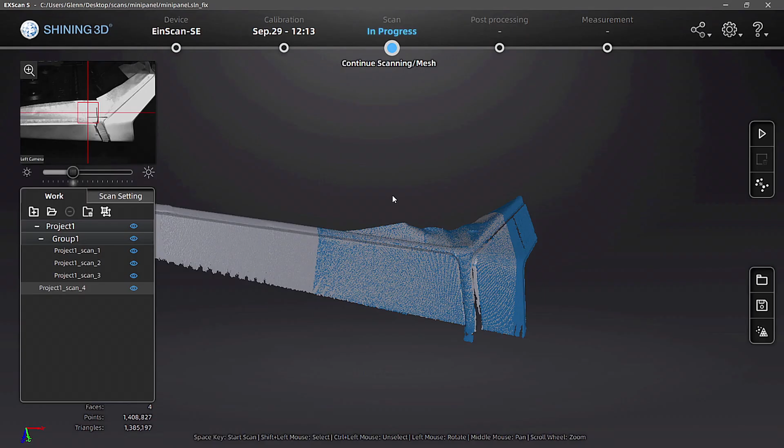Welcome to video number 2 on building our Streamdeck trackball controller holder. You remember in video 1, we scanned our Resolve mini panel. We took that scan into Fusion 360 and we built a mock Resolve mini panel inside Fusion 360 using the dimensions from the scan. We then brought in a mock of the Streamdeck, positioned that in an orientation where we could try to have 2 Streamdecks next to the panel.

That's what we want to build a box around today. We want to build a box that can hold the Streamdecks and eventually hold our trackball as well. We want it to all incorporate as nicely as possible into the side of the DaVinci Resolve mini panel. So let's go into Fusion 360 and see what the next step is going to be.

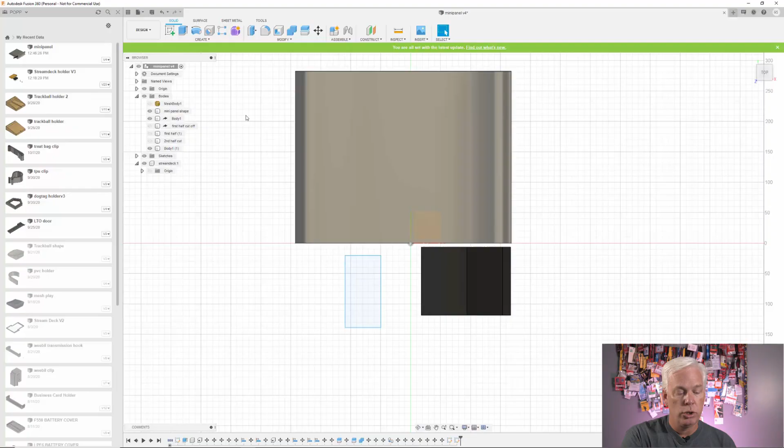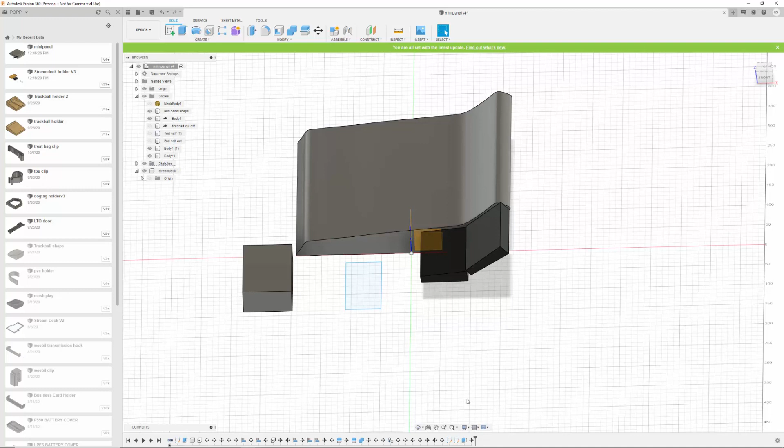So we know the dimensions of the sides and the length of the box that we need to build. So I'm building what is called a sketch to those dimensions. I can then take that sketch and I can extrude it into a full box shape. And the size of the box at this point isn't important. It just has to be roughly big enough to fit my Streamdeck in it depth-wise. So there is my first box.

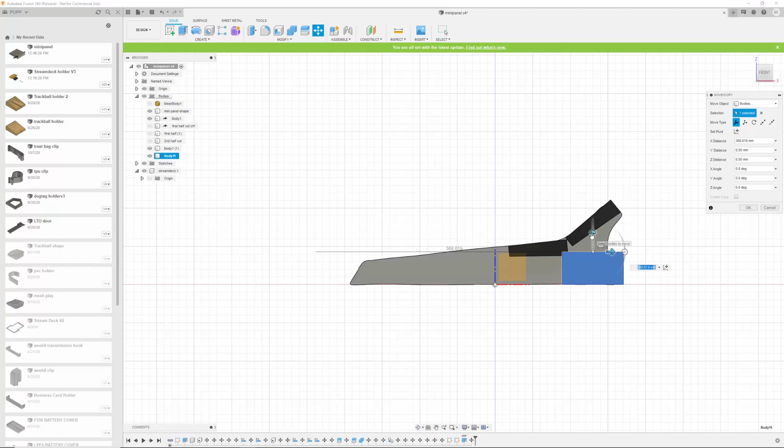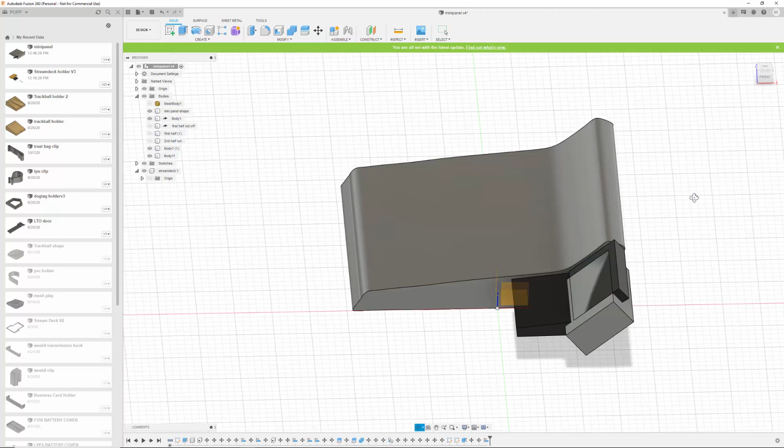Now we're going to take this box and we'll position it underneath our first Streamdeck, our upper Streamdeck. Now we do want to try to get the angle of the box to match the Streamdeck as closely as possible. And as much as we could try to eyeball it, a better way of doing it is to align it. We can align the face of the box with the face of the Streamdeck. That will put them both at the exact same angle. And there we go. So now they are at an equal height to each other and an equal angle to each other.

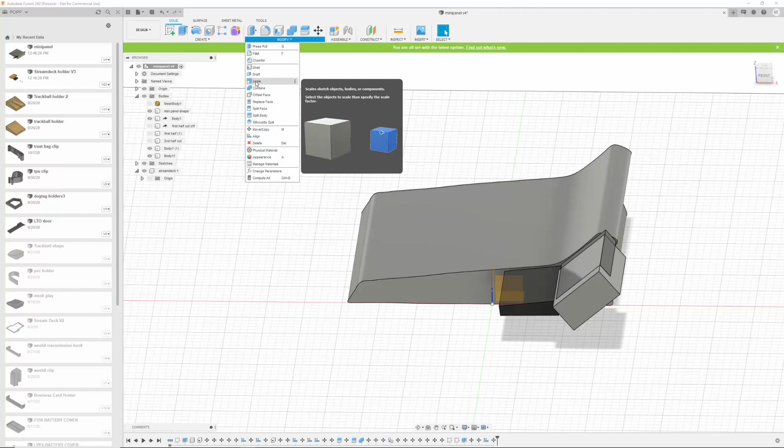Now in positioning this box, obviously we want it to be aligned with the back of the Streamdeck as well. And again, we don't really want to just eyeball it. We want to do an accurate alignment. So once again, I'm going to align this face with this face. That puts them perfectly flush with each other. Now, remember that the lip of the Streamdeck is going to add 2 millimeters onto our box. And that lip is not represented in my mock-up of the Streamdeck. So I'm going to move that box up 2 millimeters past the Streamdeck. And in the end, we will have that 2 millimeter buffer on all 4 sides of the Streamdeck.

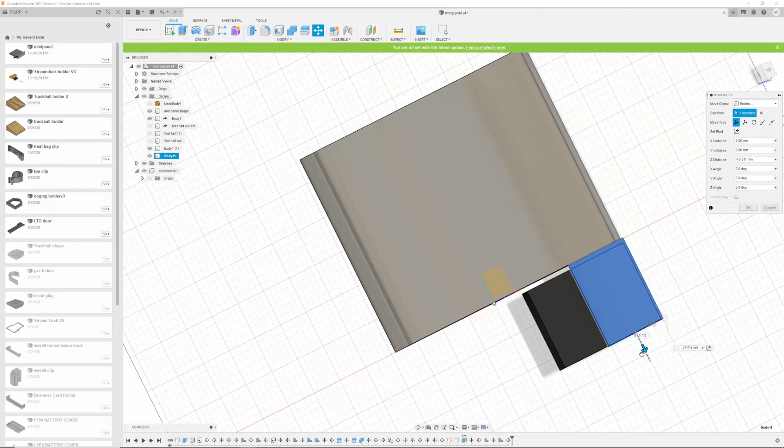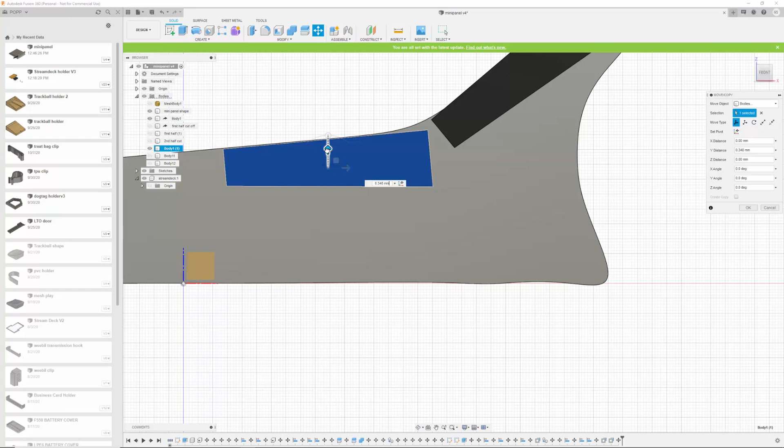And it's basically rinse and repeat at this point. We want to make sure that our box is flush on the other side as well, with a 2 millimeter gap added into it. That will essentially give us the first shape of our first box. Fairly simple once you have gotten into the hang of building these types of things. And then our next step, we're going to, of course, duplicate that box and repeat the actions to build our second box holder underneath the lower Streamdeck. And we'll just speed this up because the process is exactly the same. Align, offset, align, offset, align, offset. And here we are with 2 boxes, both ready to encase a Streamdeck.

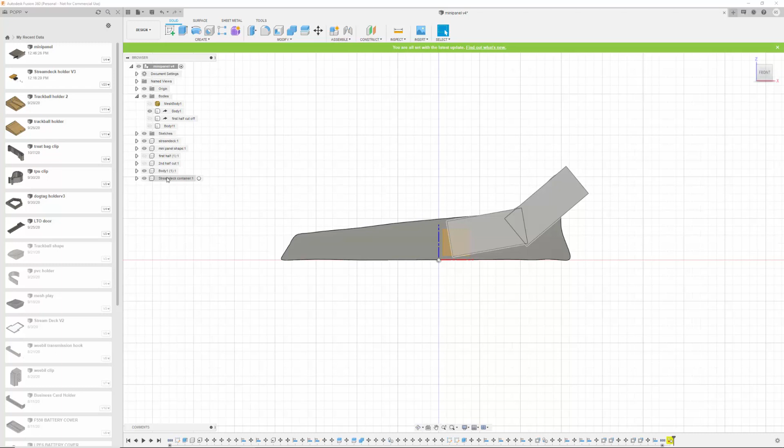Now we do want, in the end, this to be one complete box. We don't want 2 separate boxes, so I'm just going to manipulate these so that we can try to fill in the gaps between the 2 boxes. Again, very rough at this stage. I did just eyeball this. I'll be honest, I will not be surprised if once this is all said and done, this kind of becomes version 1 of a model, and then I can use it to refine the entire process and get a nicer looking shape once everything is proper size-wise.

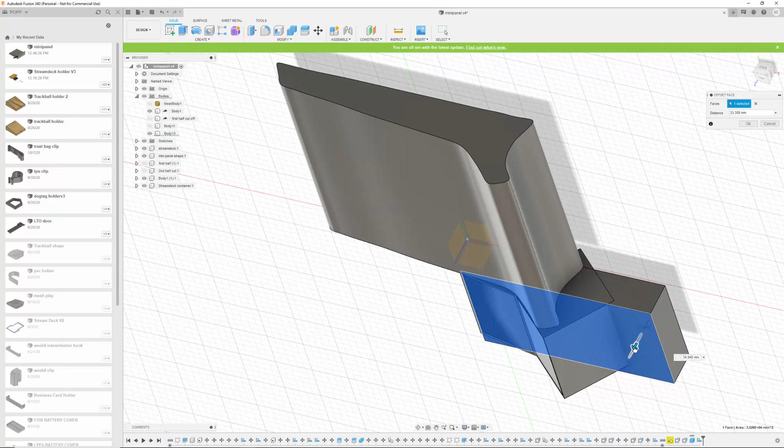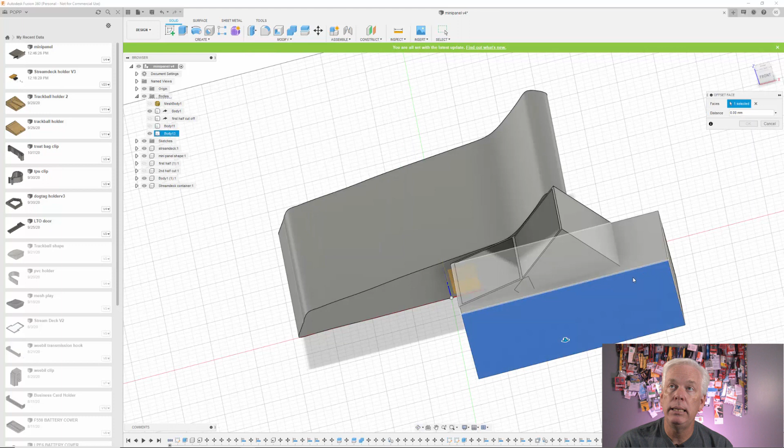So what I'm doing here is I'm building an extension box. So this is a box to encompass the 2 little boxes I've already created, because what I want to do is I want to combine all the boxes together into one solid shape. And that's a little difficult with these boxes being at the angles they're at. So I'm building a third box that, essentially, think of it as a piece of clay that can totally encompass these other two boxes.

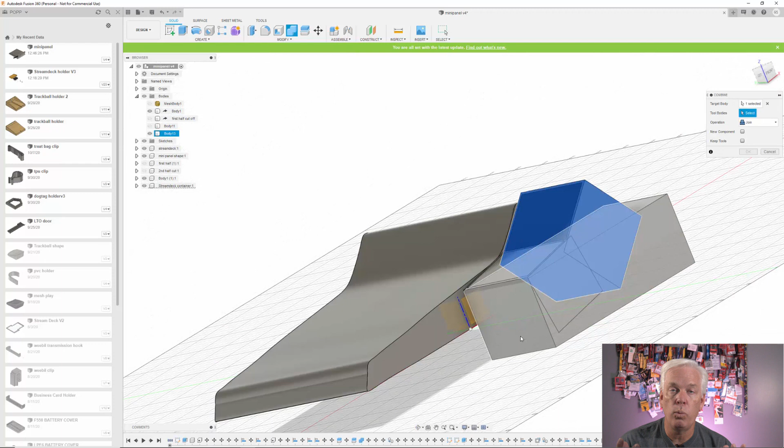Once I get it to the right size and shape to make sure it totally fills my boxes but is not any wider than they were originally, then I can combine that with my original boxes together, and I'm left with one really odd shaped box that can then be used in the construction process. So once we get it so that they're all together, we combine them together and we are left with one big shape.

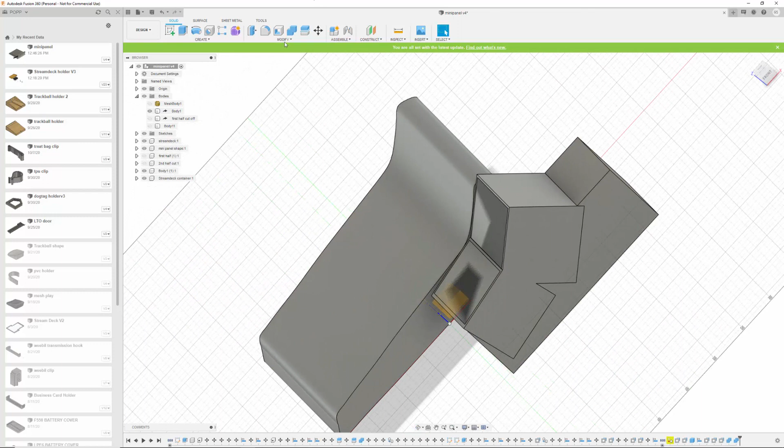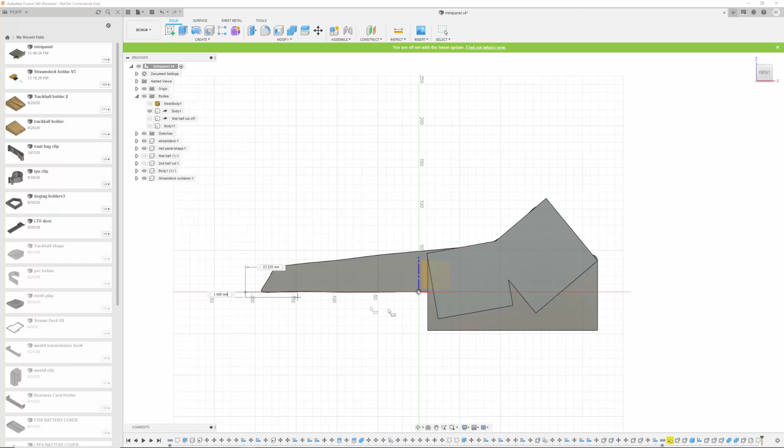Now that big shape is a little too big, so I'm going to just sneak the back in, get it a little more flush with the original back. There's a little lip on the top here. I'll try to bend it down. Again, this is very rough stages at this point, but it gives me an idea visually of what this could look like.

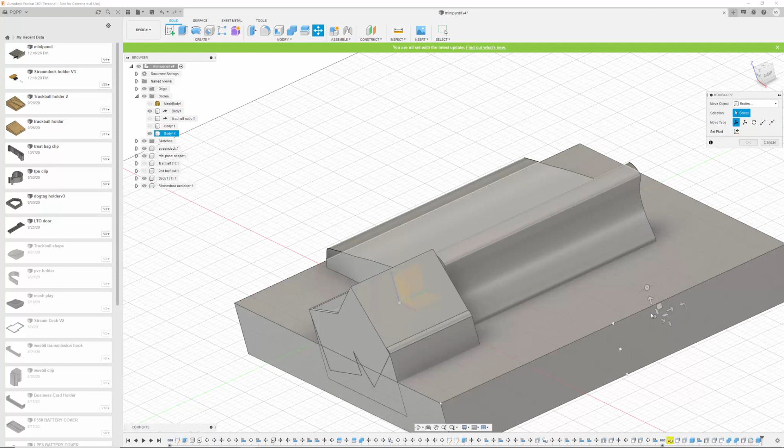Now we are also too far height-wise, because as you can see, the mini panel is much higher up. The base of the mini panel is much higher up than the base of my box. So I'm going to create another box along the baseline of the mini panel, and I'm going to use it as a cut tool. Make sure it totally encompasses our new combo box here.

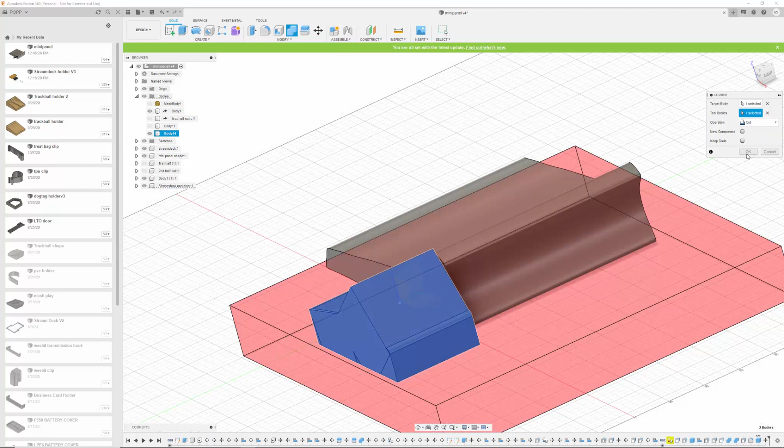I'm going to use this new box as a cut tool to lop off the bottom of that box that I just constructed. We are now left with a shape that is the same ground plane height as our mini panel. Now is the time we want to take our odd shaped box and turn it into a shell. We obviously can't just fit a Streamdeck into this solid piece of plastic. We need to cut a shape out that will hold the Streamdeck.

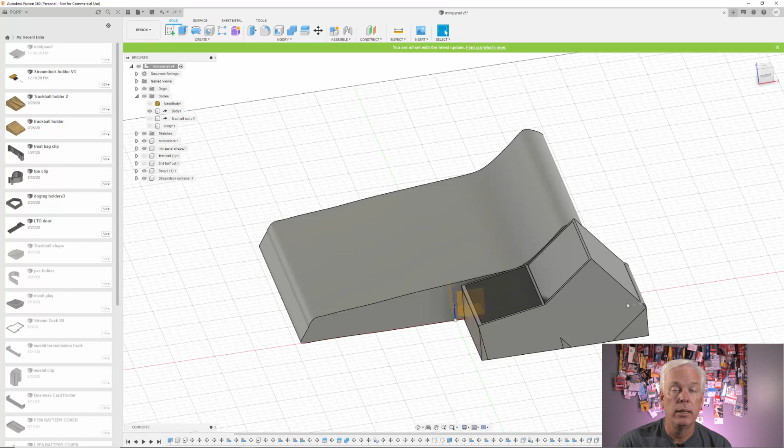So again, this is another combined effort. So we're going to select the Streamdeck, we're going to select the box, we're going to join them together, but we're going to use the Streamdeck to cut a hole in the box. And we will do that with each Streamdeck. That will leave us with a nice shell to put the Streamdecks in.

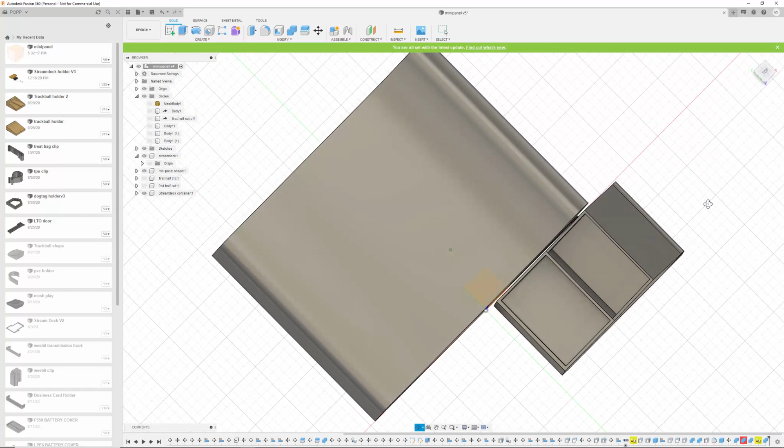Now, how deep does that hole need to go inside this box? That I do not know at this point. So that is, again, something that once we've done a bit of a test on, we will figure out how deep they need to be. For now, I'm just going to take them deep enough to make sure they are definitely deep enough. I don't want to print off a lot of extra plastic when I build these either.

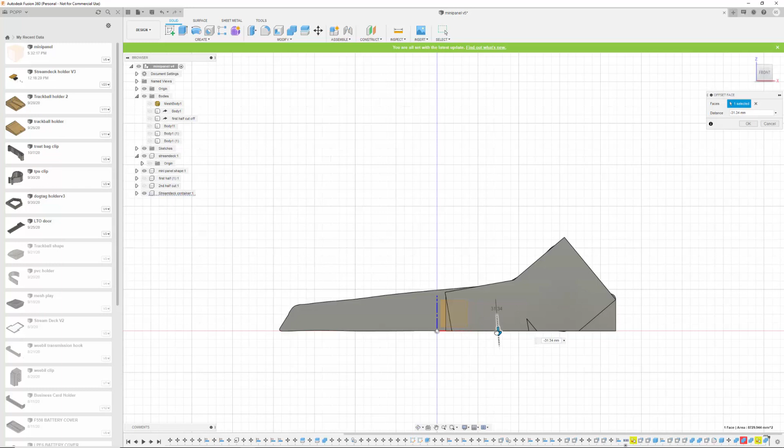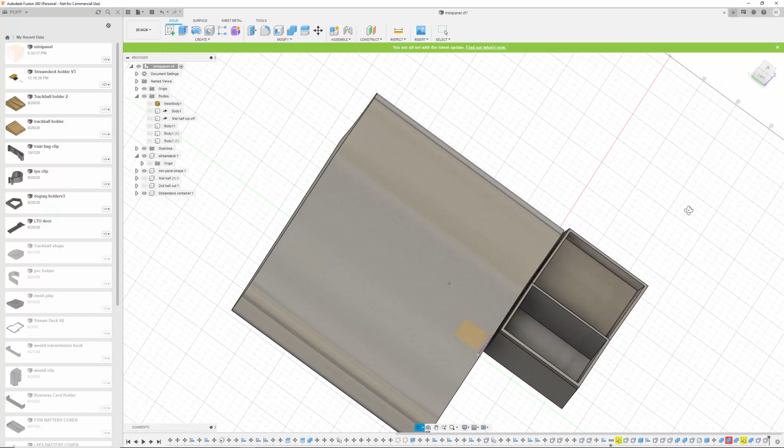So really this shell, this box that I'm building, I do want to be mostly hollow. I want it structurally sound enough that it will stand up to the Streamdecks and not move around on my desk, but I don't want to print up a kilogram of plastic just to house these things either. So I'm going to drag the shell or the cutout section inside to mostly make these boxes hollow.

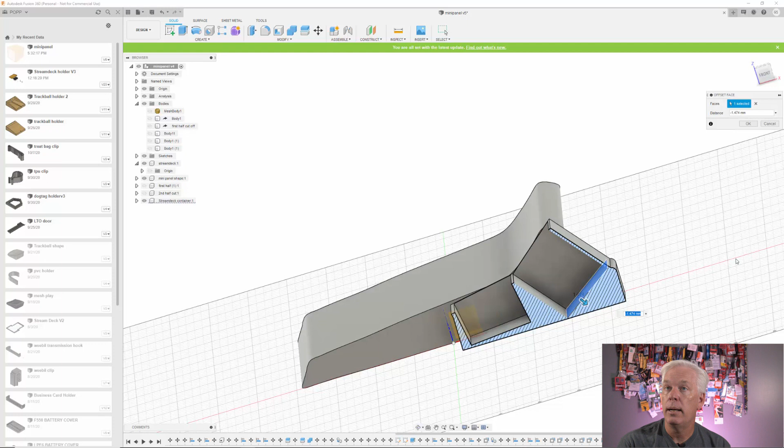Now I've turned on what is called analysis section here. So this is kind of like an x-ray view of the middle of the box. I just wanted to see how much plastic is still being wasted inside this box, because at some point I'm going to want to create a way of hollowing that out as well. Again, I don't want to print any more plastic than I need to for these devices. And I also want to make sure my base of this shell is thick enough to withstand a printout and be able to have some solid textures to it.

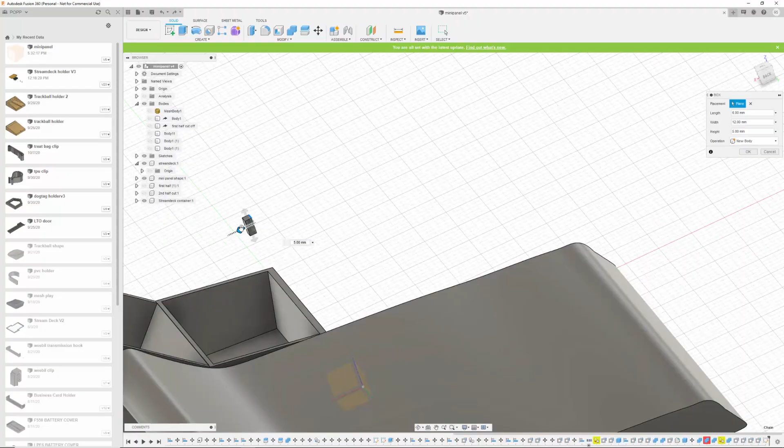And again, it's a cutting tool. I'm basically building a drill bit here. So a square with a circle is what we're going to end up building. We'll combine those together so it'll turn itself into a bit of a keyhole cutter. I can then take that keyhole cutter and use it to cut out my shapes inside of the box itself. So we'll combine them together.

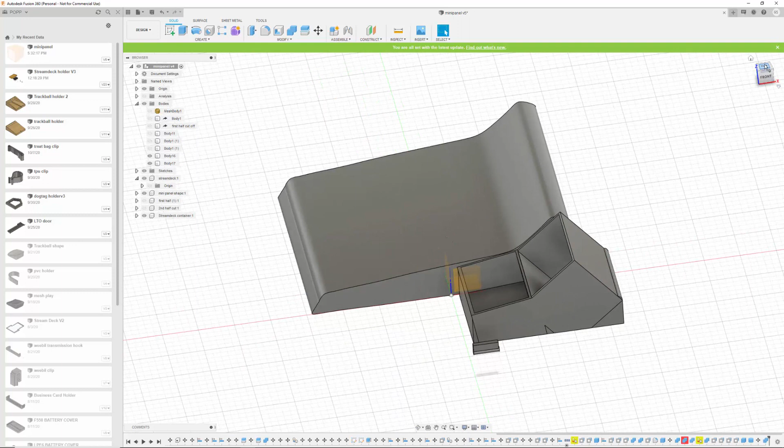I'm going to move it over, drop it down. Now we do want the top end to get cut out because we want to be able to drop the cable in. We don't want to run the cable through here. We want it to drop in from the top.

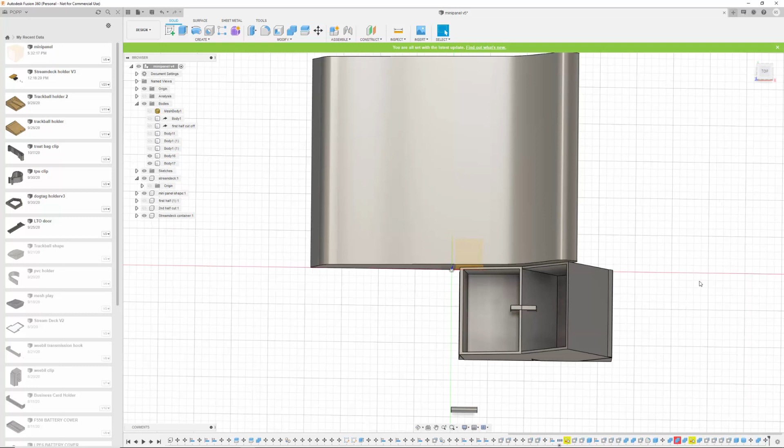And we will center it on the model. Now I did just eyeball where center was on this. We'll see if it's correct when we do our test print. Once we're happy with that, we're going to do another combine and cut function, but I'm going to keep that tool around so that I can use it again on the second Streamdeck box.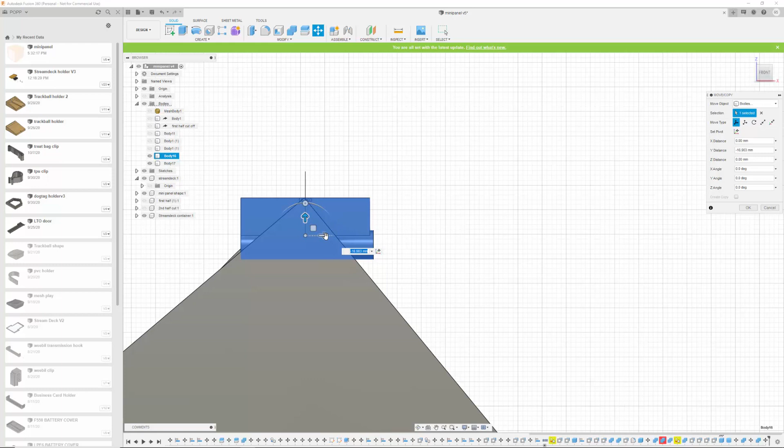So there's my keyhole cut, and we'll do the same thing on the upper Streamdeck box. Once we know we're going to hit everything, again, we do a combine with these two items with a cut function, and I actually don't need to keep the tool after this one because those are the only two keyholes we need to cut in the box. But now we're left with two nice, neat keyholes for the USB cable to drop in.

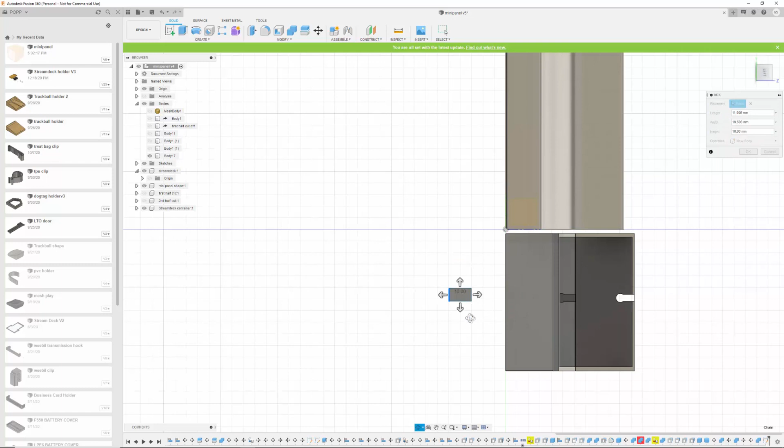And then one other item that we need to do is a hole for the trackball cable to go through. And what we want to do is have the trackball cable run from the box that holds the trackball through the bottom of the Streamdeck box and out the very back of the Streamdeck box. So it's kind of a hidden cable management system that we're building.

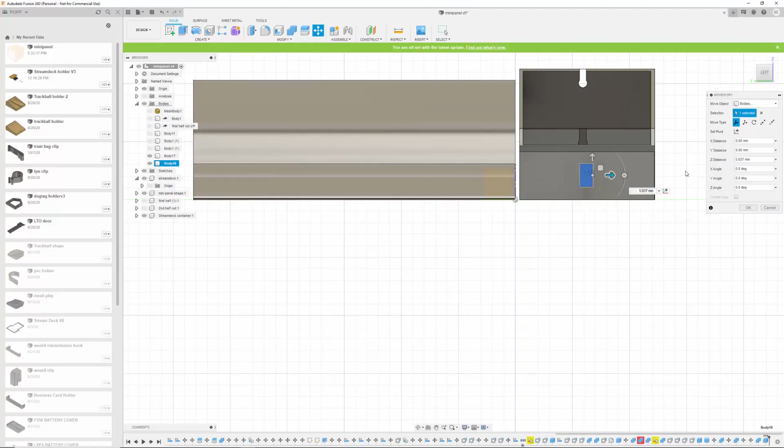We're going to build a channel through this box for the USB cable to go through. But because it has to go through it, not drop into it, we do have to cut a hole that's big enough for the USB type B end to go through. And again, we're going to do a combine cut function. I am going to keep this tool kicking around because we're going to need it in its exact position when we add the trackball holder onto this, and we'll just use that exact same cutter to cut the hole from the trackball box as well.

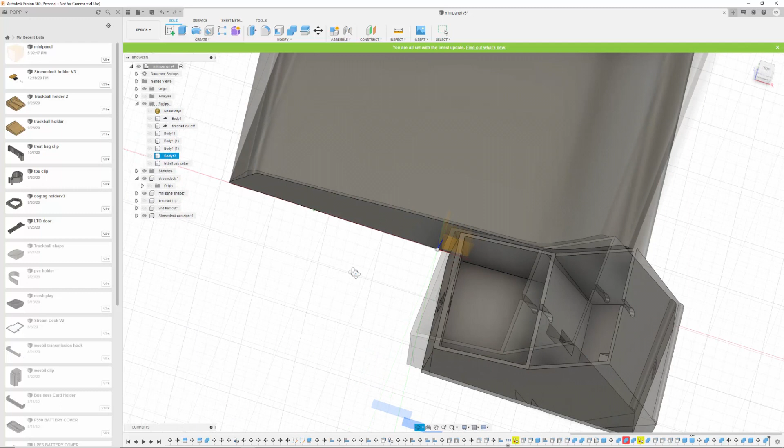So for now, we're just going to turn off the visibility of this after we've done the cut function, and that should give us a nice channel that we can visually see, and it'll also keep the tool kicking around for when we need it in the future. But there's our channel.

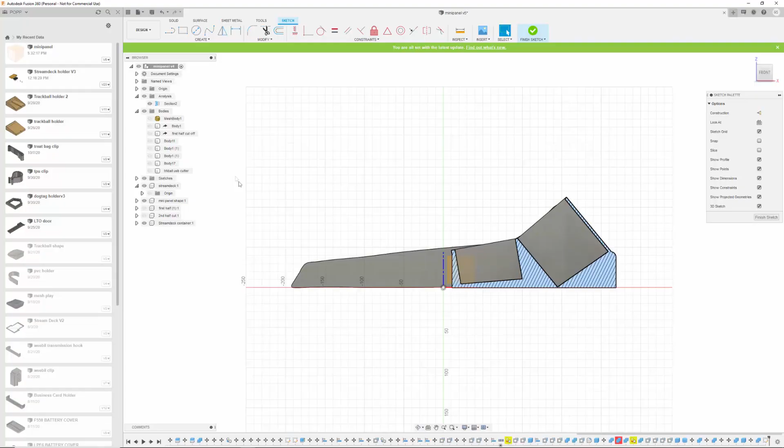And then the last thing I have to do, again, remember I said I have this area in the middle that I would like to hollow out a little bit, so I'm not printing extra plastic. So I'm just going to draw two very basic shapes that will encompass a good portion of that section, and one more time a combine and a cut function. So it's just a hand-drawn sketch shape of a triangle that fits inside each one of these areas, and that will give us a nice hollow base that is not wasting a lot of plastic when we go to print this.

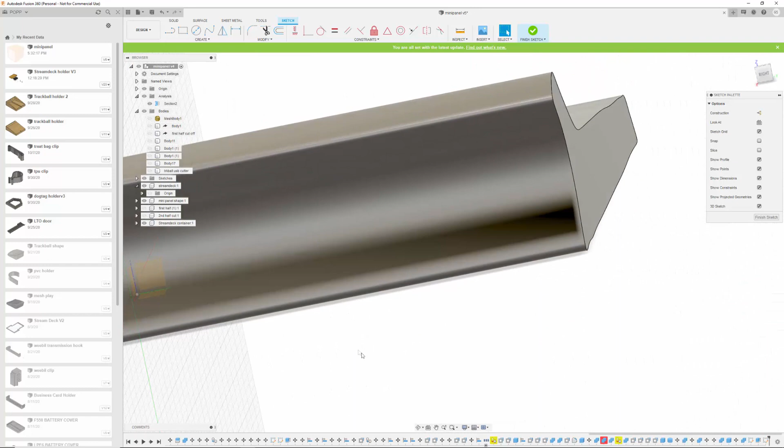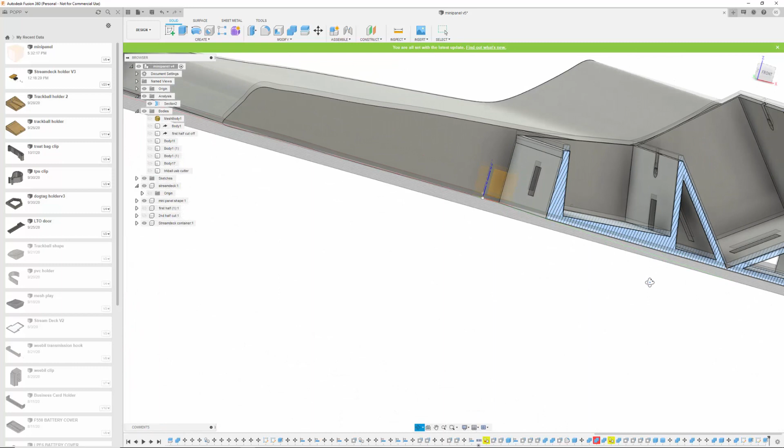Just taking that piece of plastic out of this base is probably going to drop the print time on this box down by several hours. Solid pieces like that take a long time to print. We're going to repeat that process on this other little section. We'll draw another triangle. We will extrude it as a cut tool as well. And now we're left with a couple of hollow bases in the bottom of the box. So not a lot of wasted plastic in our print.

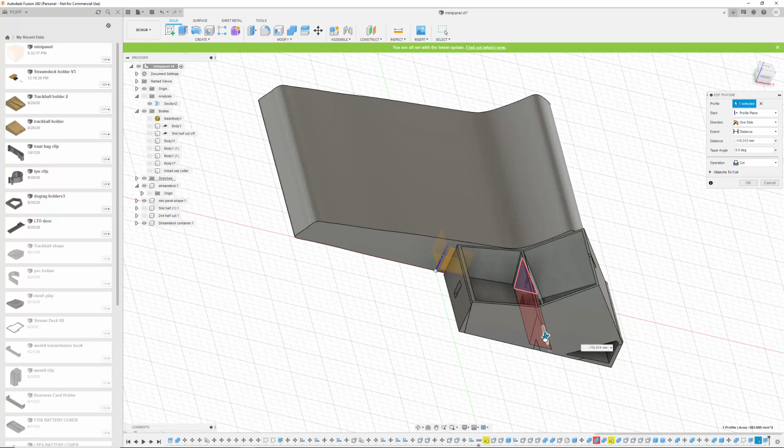We're going to see that I've actually dragged my cut perhaps a little too far, because both sides of the box that we've built are hollow on the bottom, which is fine, but they're also hollow on the sides. You can see right there the hollowness of the two items we just cut. I think from a visual standpoint, the inside part where the panel is can be hollow, but on the outside where it's a little more visual, it would be nice to have those be solid.

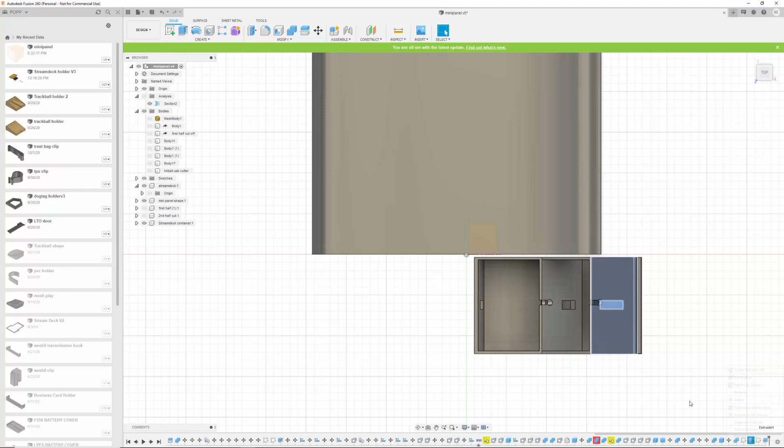So again, with my history tool in Fusion, I'm just going to adjust how far I drag those cuts. And I'm going to drag them to the point where they are no longer outside of the edge. We'll put them inside and line them up with the rest of the shell so that we're getting essentially the same thickness of shell all the way through this device on this one side. And we'll do that to both of these items.

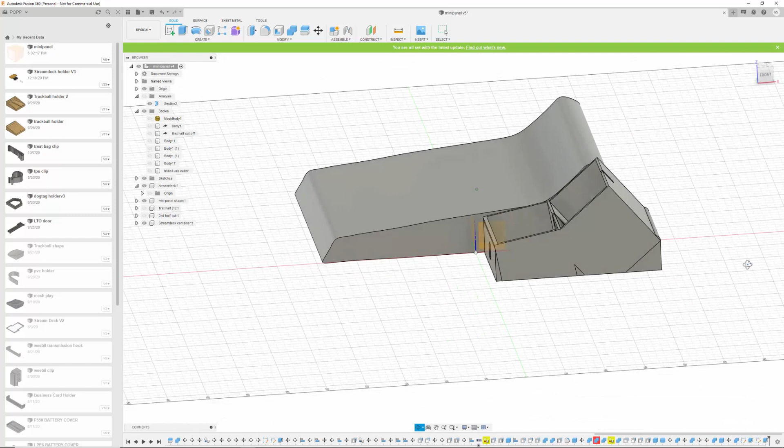The second one, we'll edit that one as well, and we will adjust how far it is cutting. Good. And now we have a hollow on the one side and we have solid on the other side.

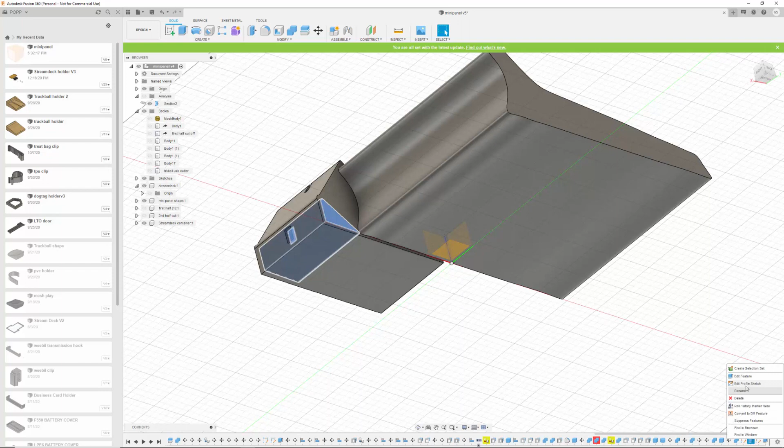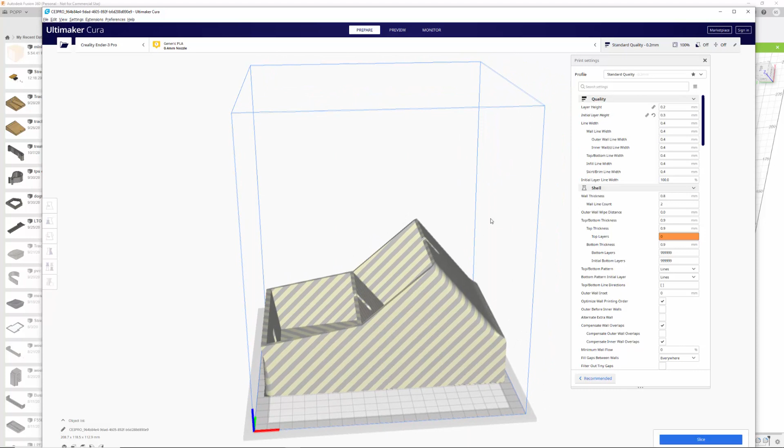Our next step, we're going to take this and we're going to dump it into Cura. That is the slicing program for the 3D printer. When we get into Cura, we discover the sad story that we are too big. We can't print this in one fell swoop. The stripes are actually showing us that this model is a little too big for our print plate.

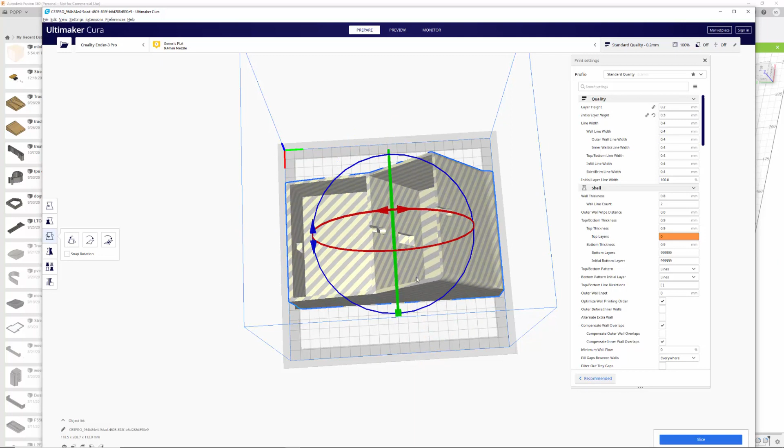Now, the final print, we could actually stand it on its end and print it in one fell swoop, but for a test print, I'm dropping this down. I just want to print the top few millimeters of each one of these sections to make sure that the hole that I've cut in the box is the right size for the Streamdeck to sit in. So I don't need to print that entire base plate and all that extra plastic that's underneath the build plate right now. I don't need any of that.

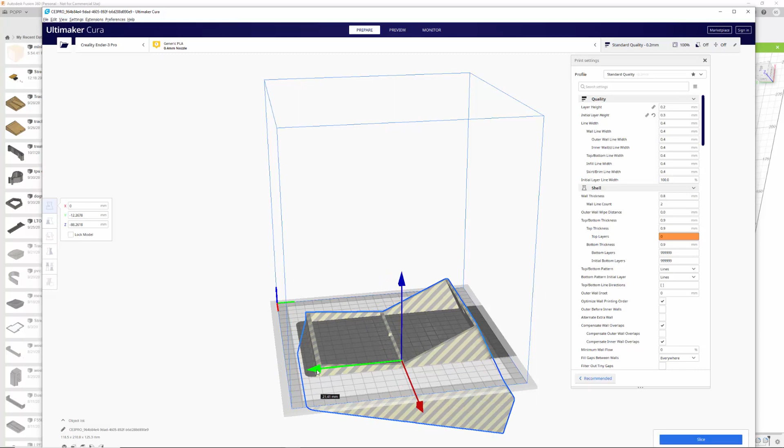Now, I thought Cura would allow me to print this now by dropping everything under it, but it is still sensing that it's a little too big, which I'm not sure why. Usually it lets me do this, but obviously something somewhere is confusing it as to my size.

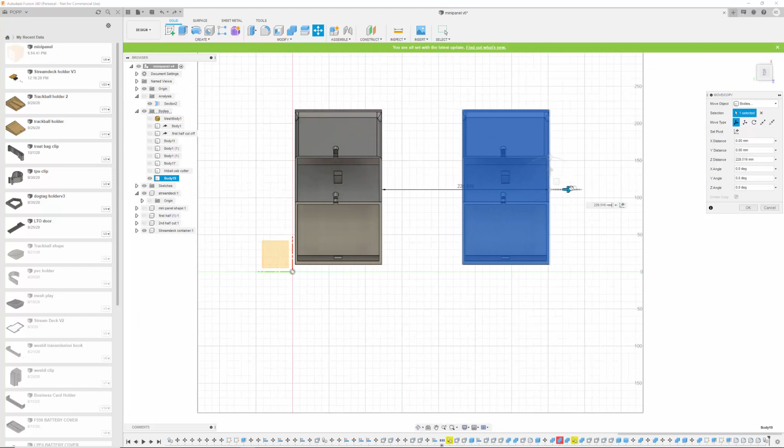So what I'm going to do is I'm going to take this back into Fusion 360 and I'm going to duplicate my model. I don't want to ruin my original model here because we are going to ruin the duplicate model. And I'm going to build one more cut tool for this model, and I'm going to cut everything away from this except the parts that I want to print for this test.

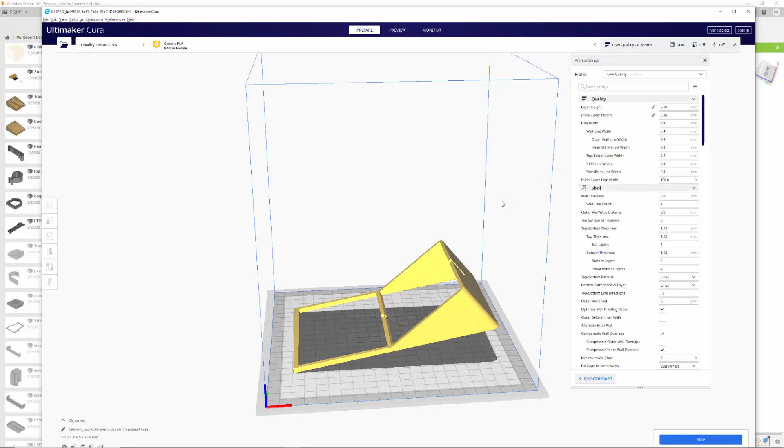And now this I will send to Cura to print. This I think will fit on the build plate, and yes it does. You can see the stripes are gone. We're now a solid yellow. I just have to arrange this so that it sits flat on the build plate. So I have taken that to the printer. I have printed that device, and here it is right here. It looks not bad for a first run.

Remember, this is a first test. I expect to be doing this at least 2 or 3 more times in partial stages to try to figure out if we are close, good. We don't want to print what could end up being easily a 20-hour print, to have that be our test saying, oh look, it doesn't quite fit. So here is our first test print.

And if we put the Streamdeck in it, we see that the size is actually perfect from a fitting of the Streamdeck. We do also, however, see that my hole for the USB cable is not quite as perfect. I'm a little too off-centered. My option would be either to enlarge the hole a little bit for the USB cable or move it over towards center. We'll probably move it over towards center.

The lower Streamdeck, same thing. The size is perfect. The hole for the USB cable is not. They line up with each other, so the fact that one is out means they are both out. We'll do what we should have done the first time. We will measure the hole and we will put it exactly where it should be. So, but size-wise, I think we're pretty good.

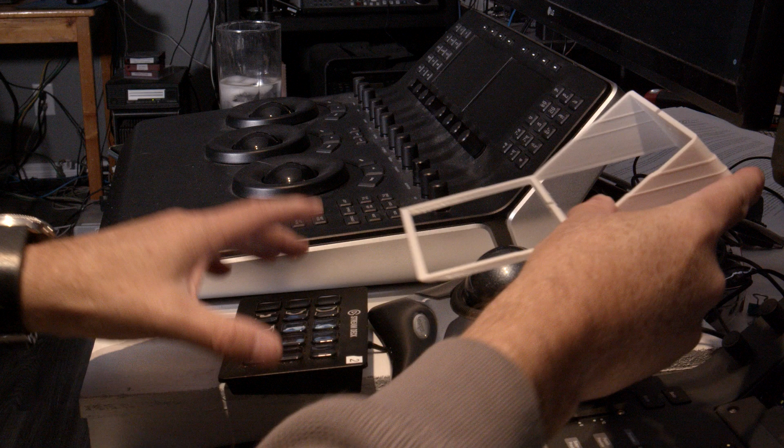Angle-wise, let's take a look. The angle looks close. It does look very close. If we were to put that against the silver and that against the black, it's pretty close. Now again, I had mentioned the idea that these two square pieces are trying to fit into a fairly curved section. So there's going to be a little bit of give and take, but I think from a size and an angle standpoint, we're pretty close.

I think we could actually separate these out a little bit more, get that first one up a little higher, and drop the second one down and have it more on the second section here. And so we're going to go back into Fusion 360. We're going to modify this a little bit. Change the hole for the USB cable, and I think we are going to work a little bit again on layout because it's not quite there yet. So that will be what we do in part 3 of this video.

Now, I warned you at the start, this is going to take several videos. It's not going to be a snap my fingers and it's done. It's going to be a bit of a battle for me to get to the point where I'm happy with how this box works. So I hope you've stuck with it for this entire part 2, and I hope you come back for part 3, and we'll see how much we can improve on this to our next stage.